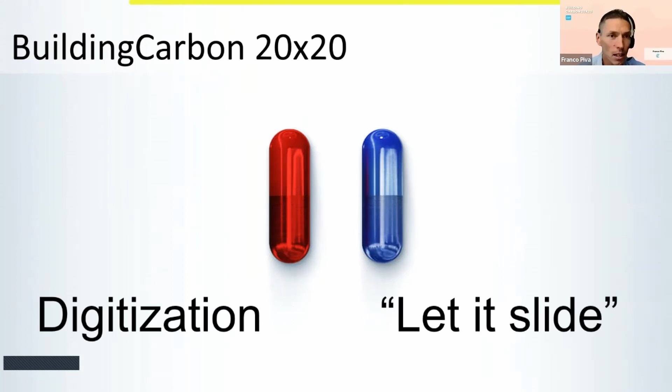As the other speaker said, this building industry has to face some challenges, so we have to choose, as in the movie Matrix, to digitize and decarbonize the industry or let it slide. It's up to us, but in my opinion timber is and must be part of the solution. Timber is a kind of new material for the building industry, but we have to find new ways to use it to make timber the most cost-effective solution to go for.

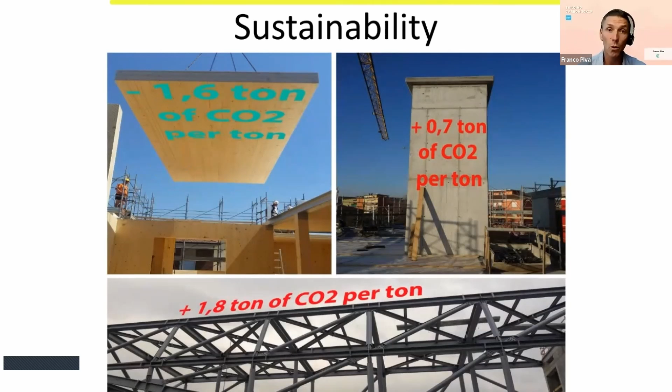And the reason is very simple: is the world asking for this? We need to go for more sustainable materials. We need to store CO2 or reduce CO2 emissions instead of emitting CO2 like other materials do. I'm not saying to get rid of steel and concrete, I'm saying to use materials in a wiser way. The timber industry is already there.

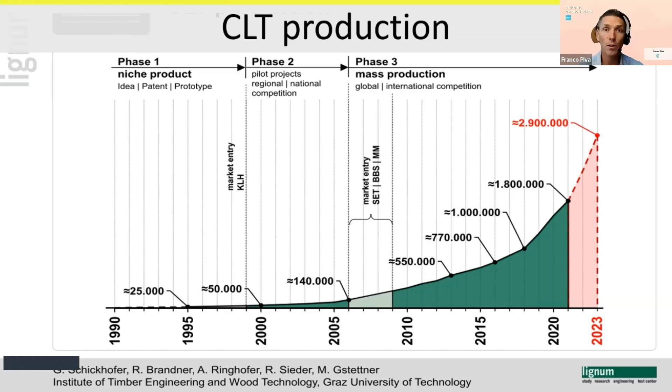This diagram shows how global CLT production is skyrocketing all over the world. We expect to produce almost 3 million cubic meters of CLT by 2023. So why are we not using this material? Why are developers and builders not using this as a main material?

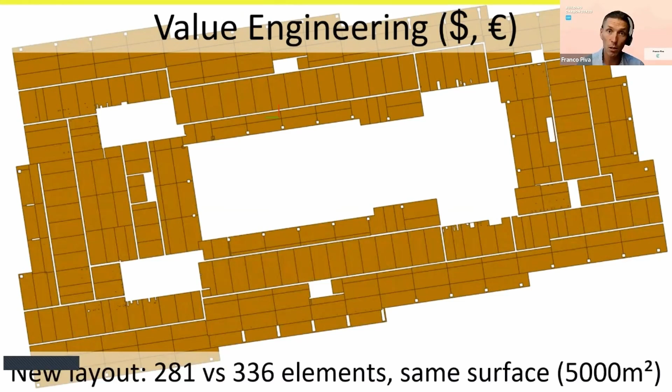One of the main reasons is the cost of the material. So timber engineers are able to value engineer the project and reduce the cost. As in this example, we reduced by more than 50 panels the number of CLT panels to install, and we helped the developer save more than one week per floor.

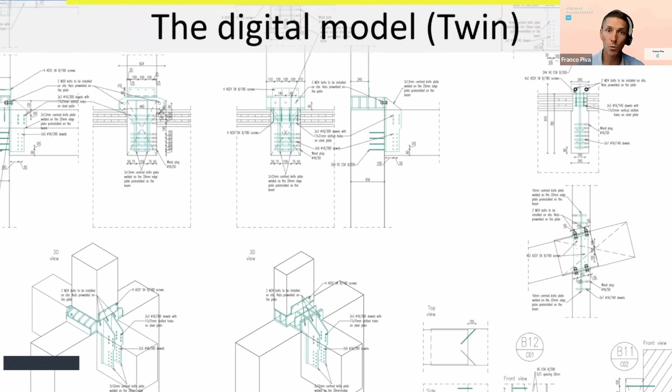The way we work is to strongly implement a digital model in our workflow. Other speakers spoke about the digital twin, but we are already there. The industry is already using the digital model. In a holistic way, we need to implement the digital model to de-risk the projects and foresee all the problems we could have on site.

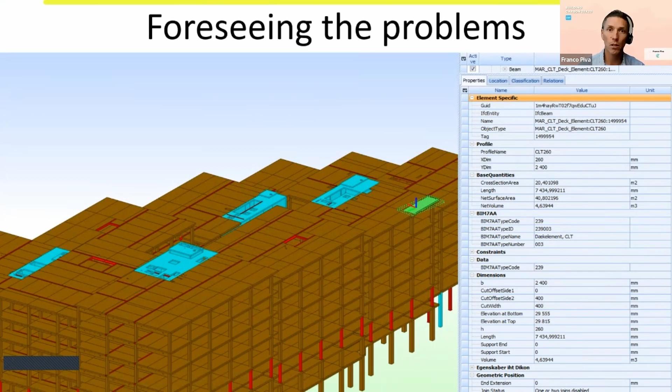Timber is a very flexible material, we can use it in many different ways, but people are quite skeptical when we speak about this material. So the digital model allows you to receive a 3D model weeks before having the material on site, and you can deeply analyze the model. You can just click on an element and see who that element is, how big it is, how tall it is, how heavy it is.

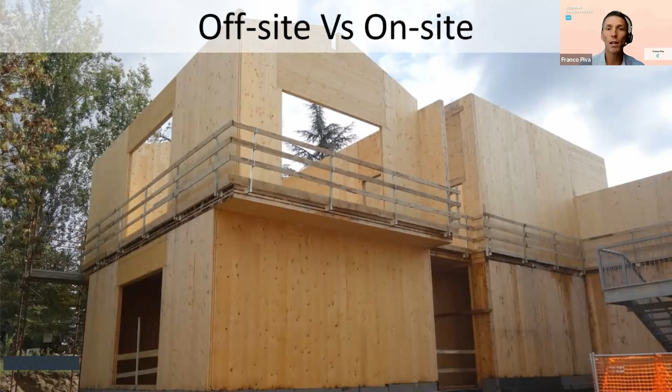And once you receive the material on site, you will say, wow, this is what you see is what you get. I saw this on my monitor, I received this component on site. It doesn't matter the complexity, no matter how complex it is, because there will be a CNC machine working for you and making that component to assemble on site.

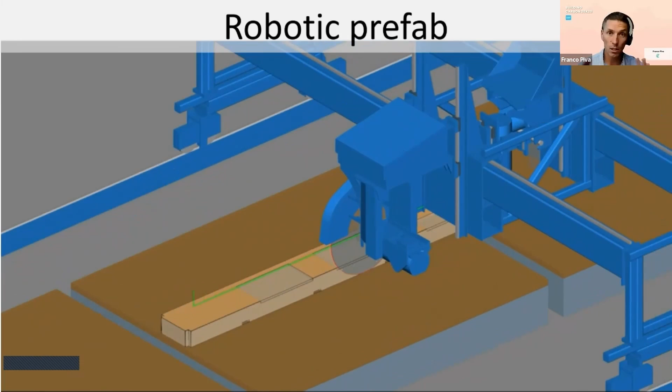So we always try to value engineer the product to work more off-site and reduce time on-site. On-site, we expect to assemble just a list of prefabricated components. All this can be called design for manufacturing and assembly. DFMA is definitely one of my favorite acronyms in the building industry, and I see DFMA as the new value engineering tool. Without this approach, we cannot value engineer any project.

Thanks to DFMA, we can see in advance how the robots will work in the factory, and we can see if there are warnings, if everything is okay, or if something is a bit incorrect, to solve many problems. I like to use again this thing from the movie Matrix: we see our model, our world, as an endless sequence of digital numbers. For you it's a beam, but for us as timber engineers, it's just an endless sequence of numbers and letters.

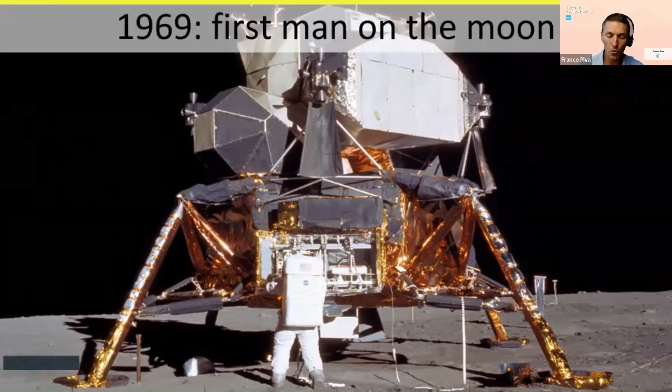DFMA approach, or something similar, was used even in 1969 when the first man landed on the moon. They had to foresee every single problem, every possibility. So they had to work in a very precise way. They didn't have the computer, but they had a brain to use.

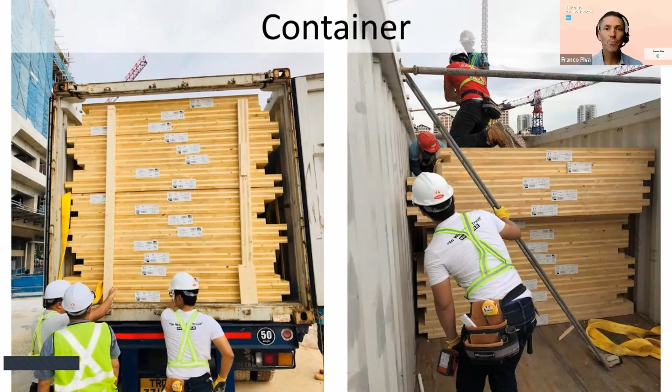In this manner, using DFMA, we manage many different projects all over the world just by sharing the digital files with our clients. Of course, when we work in countries like Australia, we need to take into consideration how the elements will be loaded in the container, how they will be transported. We cannot ask to have a container 5 centimeters longer, 1 inch longer. That is the standard size, and we have to keep it in mind.

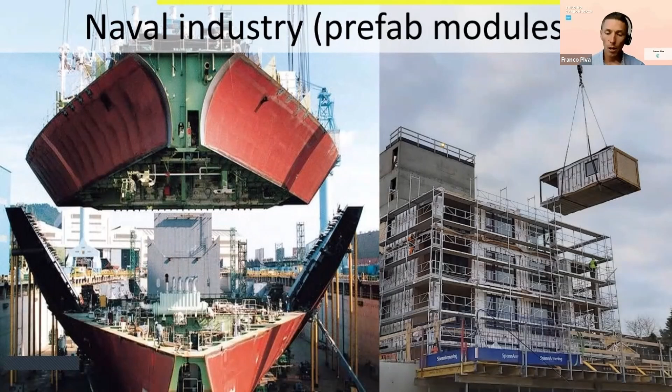I'm not saying that we need to just make standard homes, to build black homes as Henry Ford did more than 100 years ago. He found a way to solve the problem at that time to build cars. I'm more saying in this case to take inspiration from shipyards. They prefabricate modules, they prefabricate elements, and they assemble those elements on site in the factory, in the shipyard. In that way, they reduce a lot the time to assemble it.

This is what they say in China: the best time to plant a tree was 20 years ago, the second best time is now. And I hope we will not plant this tree on Mars. We have a planet and we can save it.